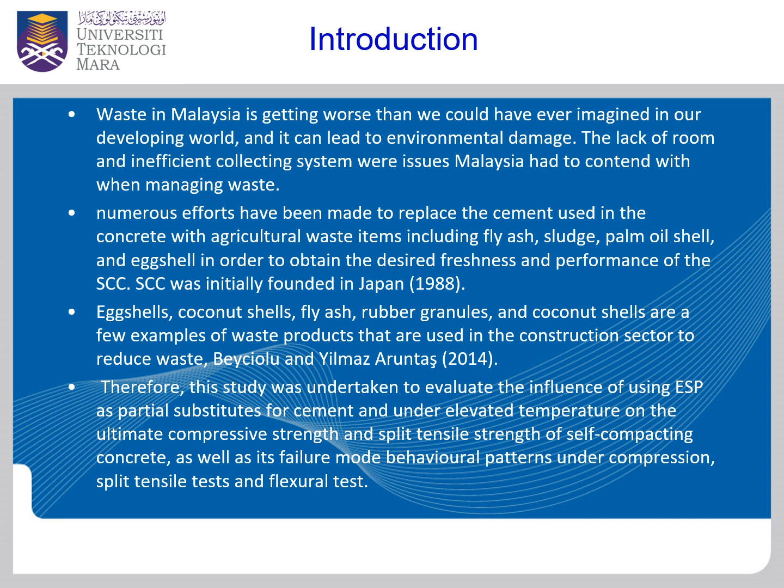Therefore, this study was undertaken to evaluate the influence of using ESP as a partial substitute for cement under elevated temperature on the ultimate compressive strength and split tensile strength of the self-compacting concrete, as well as the failure mode behavior pattern under compression, split test, and flexural test.

Problem statement: The management of the growing amount of municipal solid trash is currently a major environmental concern and needs a better solution. Only 5% of the 30,000 tons of rubbish that Malaysians create each day are recycled (Clean Malaysia, 2015). In addition, eggs are the key ingredient in a variety of goods such as cake, bread, and fast food.

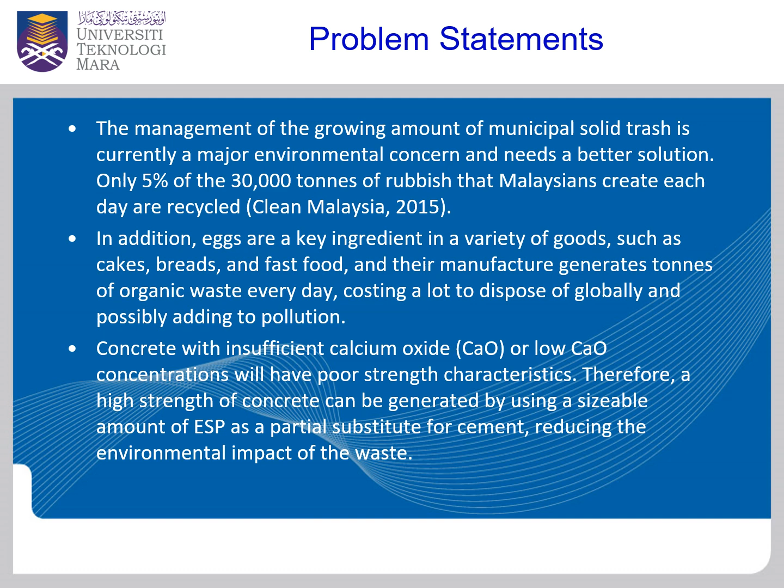Their manufacture generates tons of organic waste every day, costing a lot to dispose of globally and possibly adding to pollution. Concrete with insufficient calcium oxide concentration will have poor strength characteristics. Therefore, a high strength of concrete can be generated by using a sizable amount of ESP as a partial substitute for cement, reducing the environmental impact of the waste.

Objectives of the study, there are three. First, to assess the fresh property of self-compacting concrete SCC incorporating eggshell powder ESP. Second, to determine the ultimate compressive strength, split tensile strength, and flexural strength of the SCC incorporating ESP under elevated temperature. Third, to observe and characterize the failure modes of the proposed SCC cube under elevated temperature.

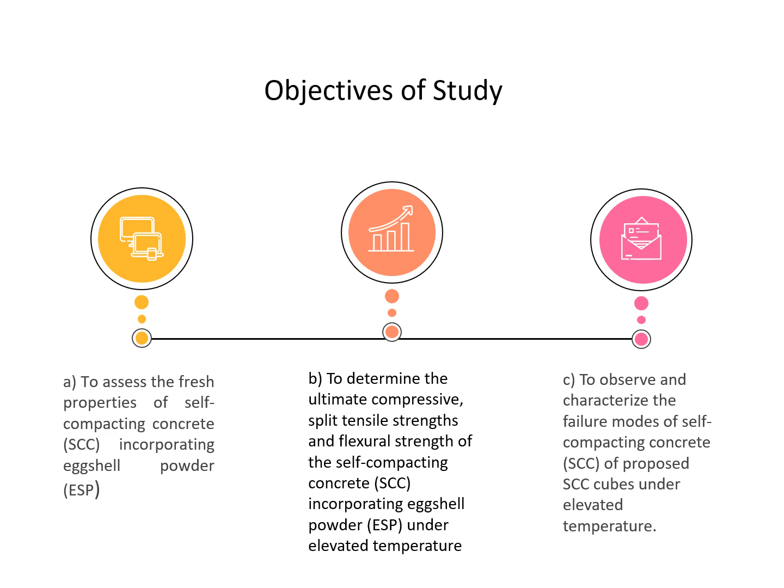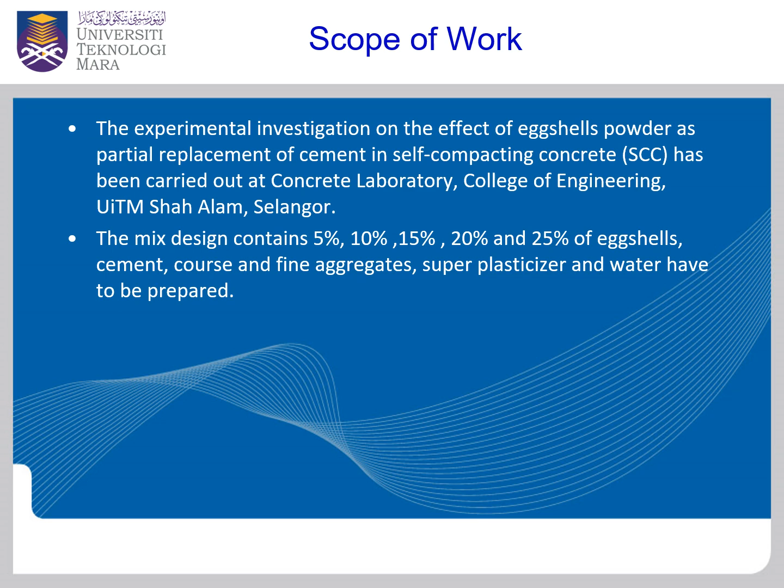Scope of work: The experimental investigation on the effect of eggshell powder as a partial replacement of cement in self-compacting concrete SCC has been carried out at the Concrete Laboratory, College of Engineering, UiTM Shah Alam, Selangor. The mix design contains 5%, 10%, 15%, 20%, and 25% of eggshell, along with cement, coarse and fine aggregate, super plasticizer, and water.

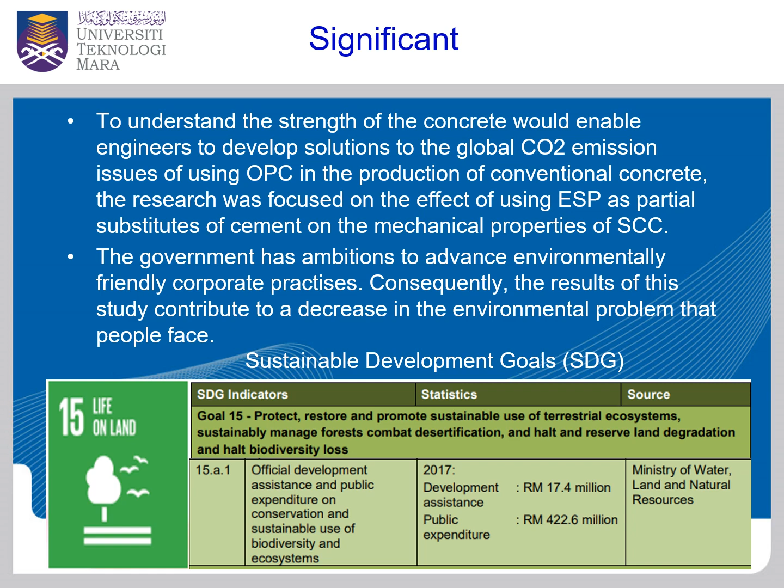Significance: Understanding the strength of concrete would enable engineers to develop solutions to the global CO2 emission issue of using OPC in conventional concrete production. The research focused on the effect of using ESP as a partial substitute of cement on the mechanical properties of SCC. The government has ambition to advance environmentally friendly corporate practices, and the result of this study contributes to decreasing the environmental problems people face.

Literature review: Inadequate compaction of concrete can lead to lower strength and poor durability of hardened concrete. Therefore, to overcome the problem of non-uniformity, non-homogeneity, and inadequate compaction, and to improve its placement in structures with congested reinforcement and restricted areas, self-compacting concrete has been introduced to the construction industry.

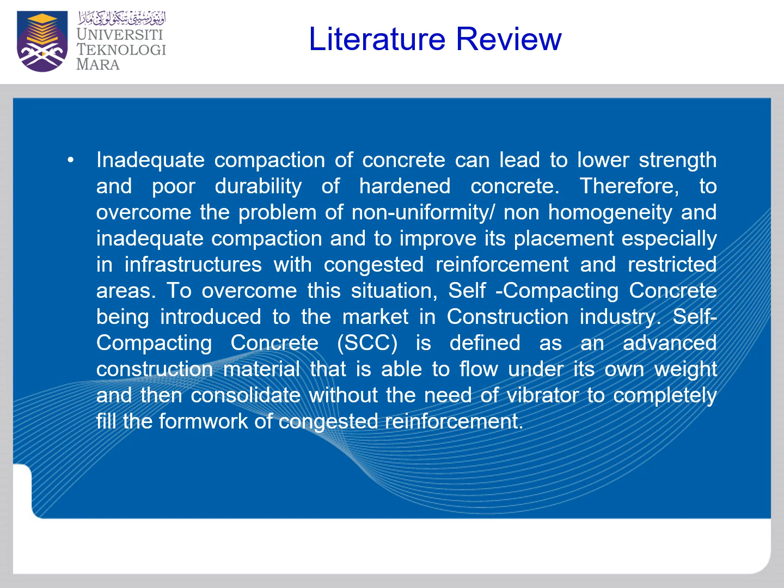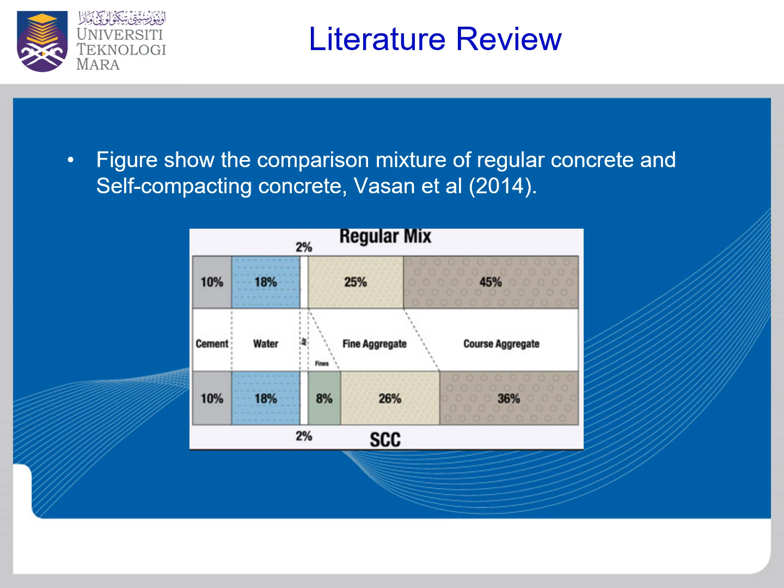Self-compacting concrete (SCC) is defined as an advanced construction material that is able to flow under its own weight and then consolidate without the need of a vibrator, to completely fill the formwork and congested reinforcement. The figure shows the comparison mixture of regular concrete and self-compacting concrete (Vasan et al., 2014).

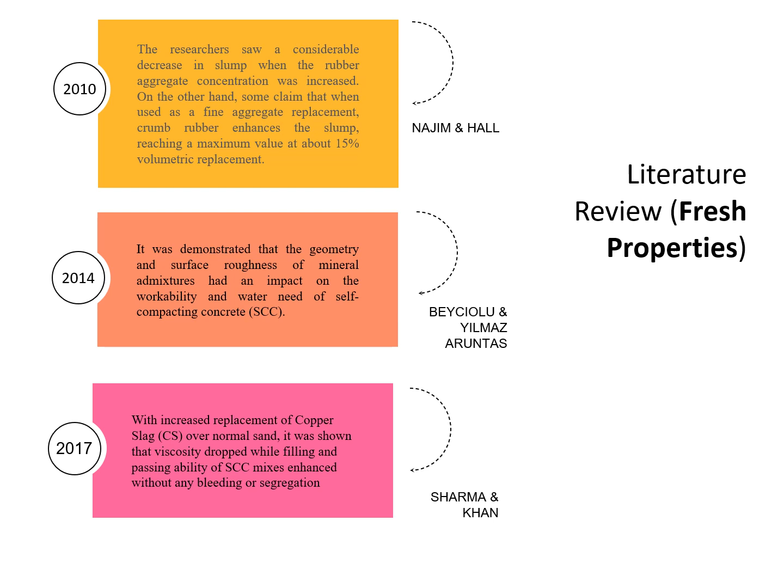Literature review by Najim and Hall, Beyciolu and Yilmaz Aruntas, Sharma and Khan. Literature review on hardened properties by Yeralamala, Matzin et al., and Tagadagi et al. The research gap, and fishbone diagram.

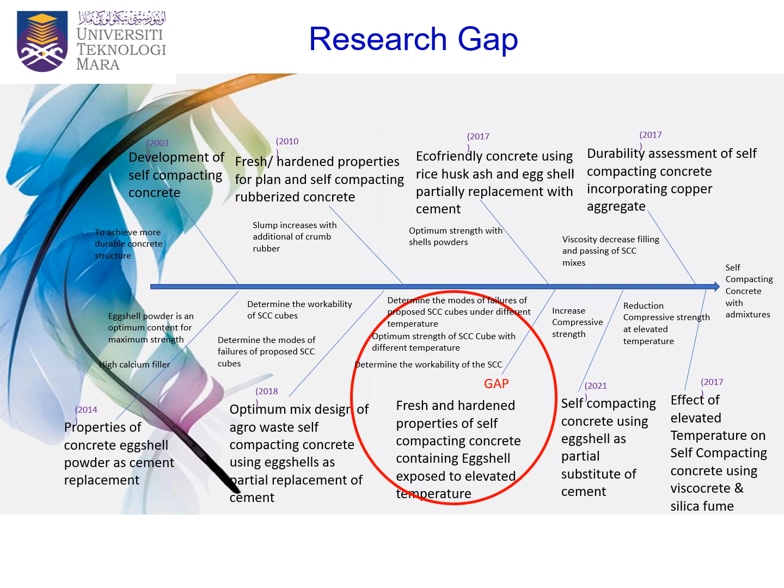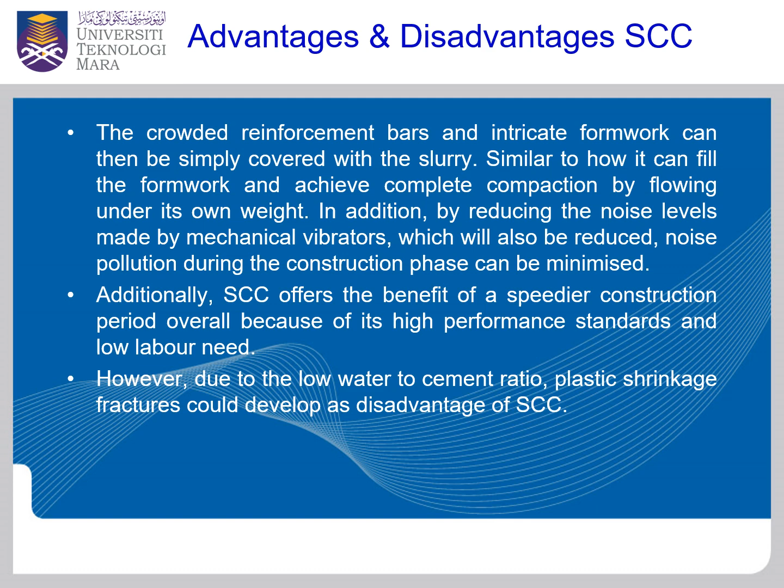Advantages and disadvantages of SCC: The crowded reinforcement bar in concrete formwork can be simply covered with the slurry, as it can fill the formwork and achieve complete compaction by flowing under its own weight. In addition, by reducing the noise level made by the mechanical vibrator, noise pollution during the construction phase can be minimized. Additionally, SCC offers the benefit of a speedier construction period overall because of its high performance standard and low labor need. However, due to the low water cement ratio, plastic shrinkage fracture could develop, which is a disadvantage of SCC.

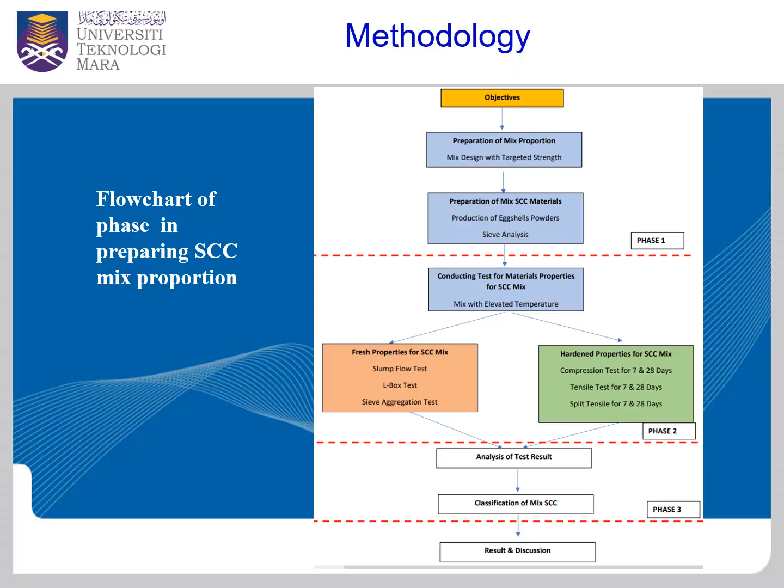Methodology milestone: the methodology flowchart of the phases in preparing the SCC mix proportion. The materials used are cement, coarse aggregate, fine aggregate, super plasticizer, water, and the main material, eggshell powder.

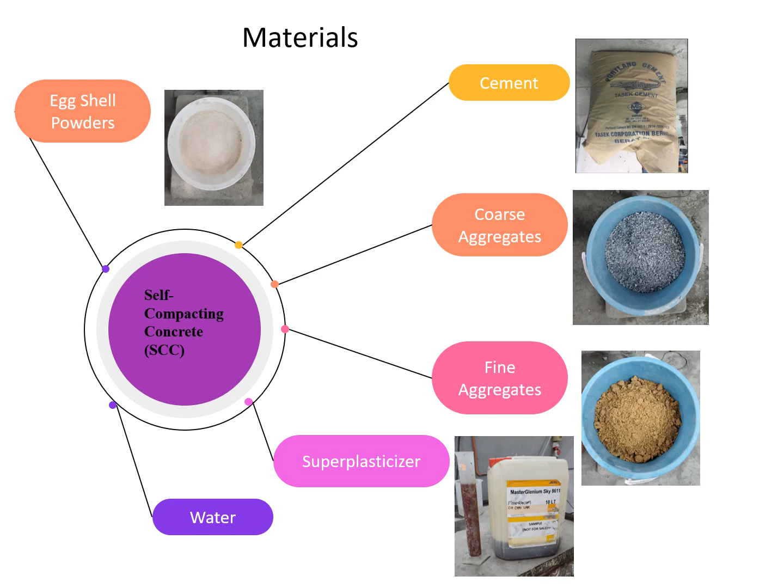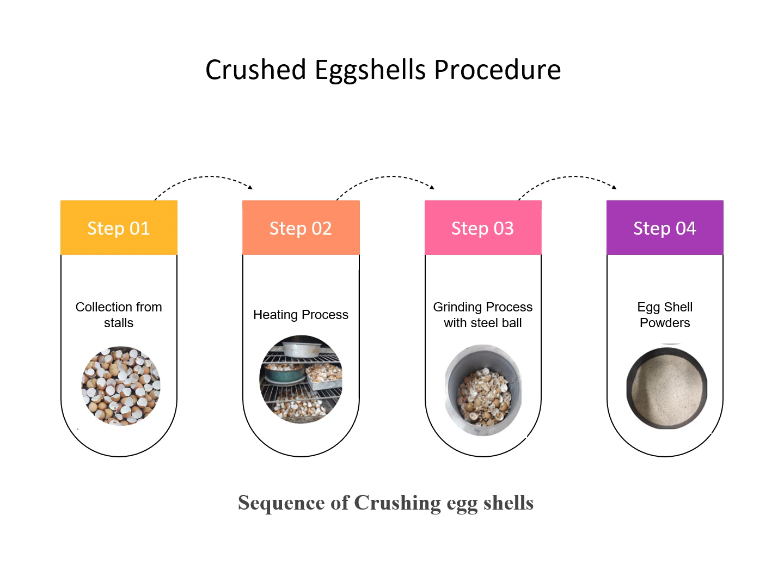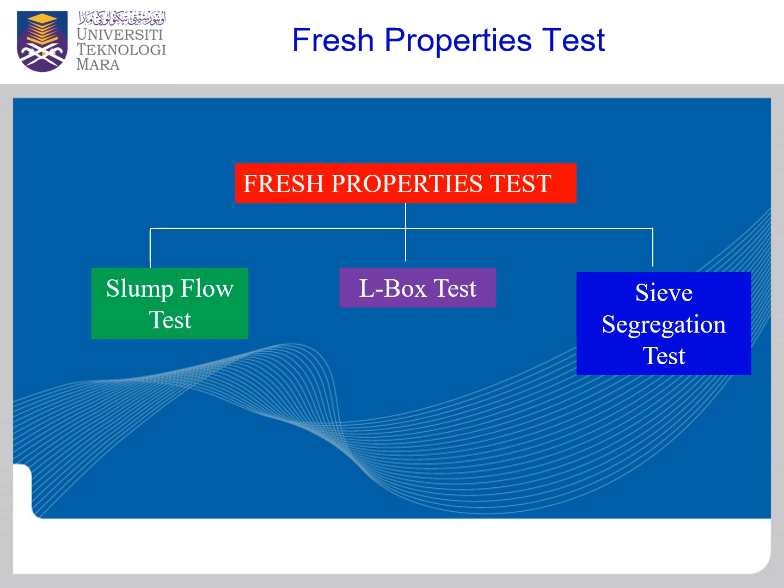Sequence of crushing eggshell: collecting from stalls, heating process, grinding process with steel ball, producing eggshell powder. Fresh property tests: slump flow test, L-box test, and sieve segregation test.

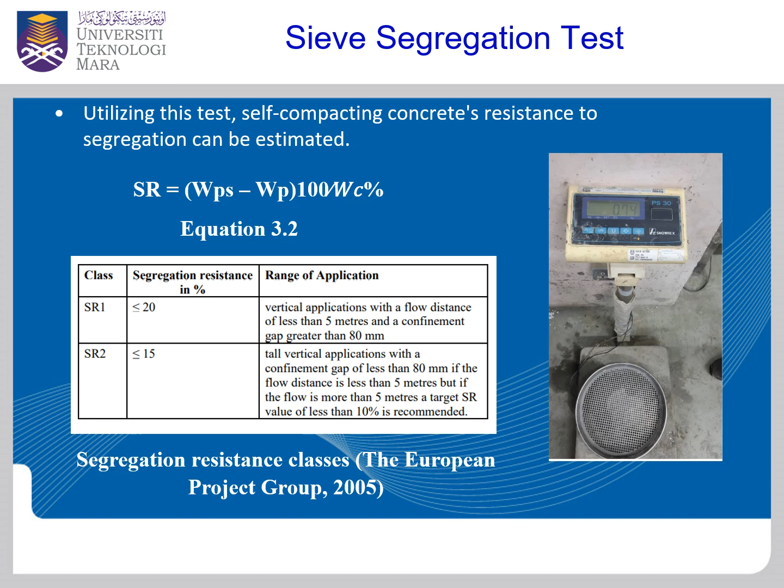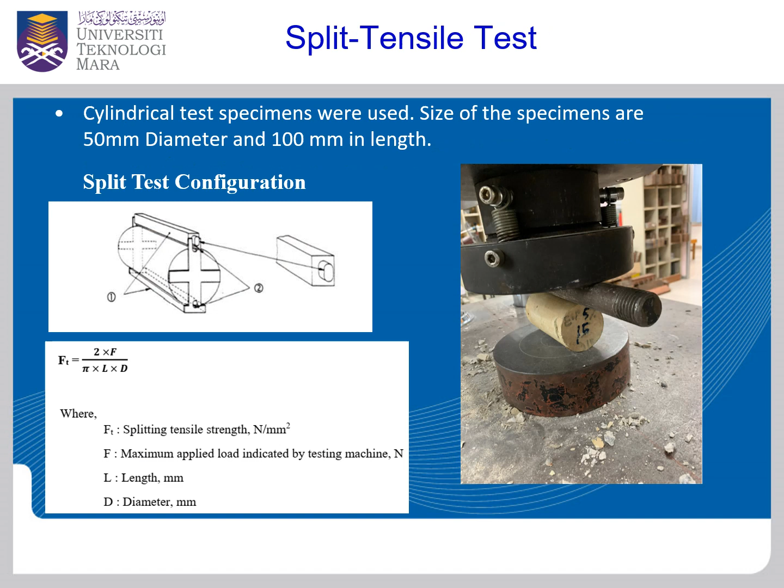Hardened properties tests: compression test, split tensile test, and flexural test, followed by the curing process and heating process.